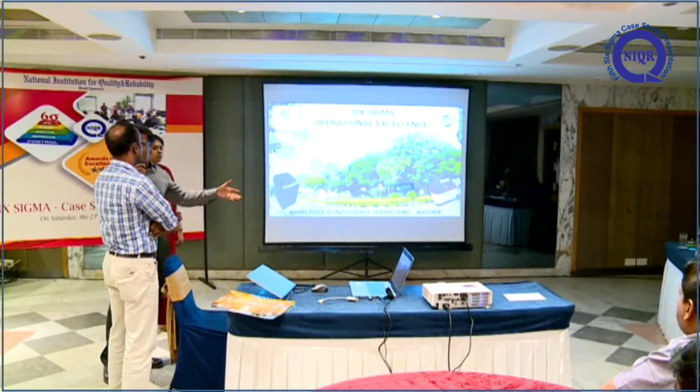This project might be of much interest to everyone here because every day your clothes go through one of these products. Let me introduce my team. I'm the project leader, and they are the project members of our team. Let's start with the presentation.

This is the agenda which we have followed for our project. We have followed a DMAIC approach and classified things as per the agenda. We'll take you through these titles and explain what our product is and what the problem is.

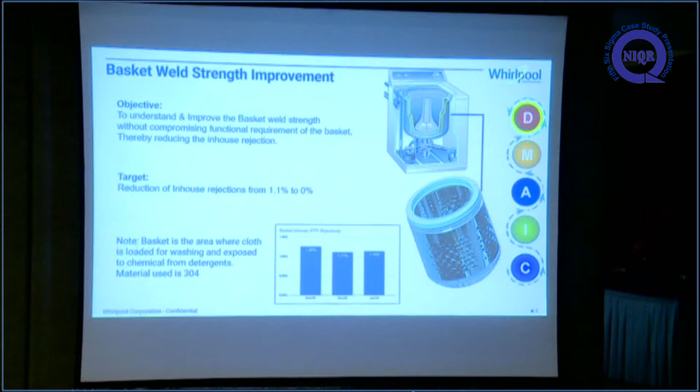The objective of our project is basically to improve the basket welding strength. The basket, as you can see in this animation, plays a major role in washing. You put your clothes, detergent and water in it, so it must have corrosion resistance.

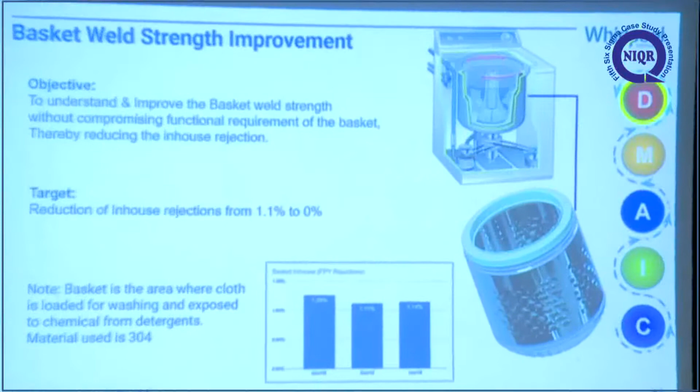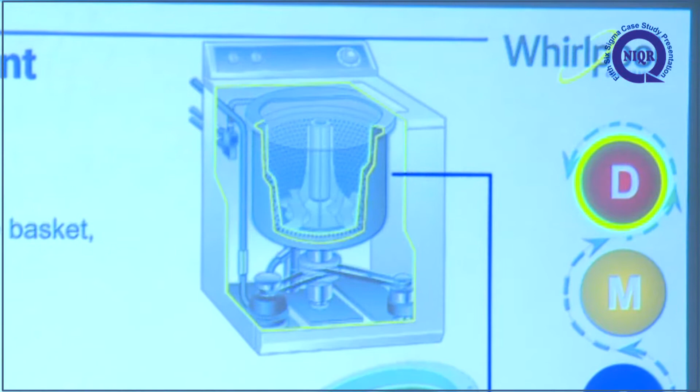Our main objective of this project is improving the welding strength of the basket without compromising any functional requirement as per the specification. Our target is to reduce basket rejections due to quality of welding, which are currently at 1.1%, a higher rate as per our rejections.

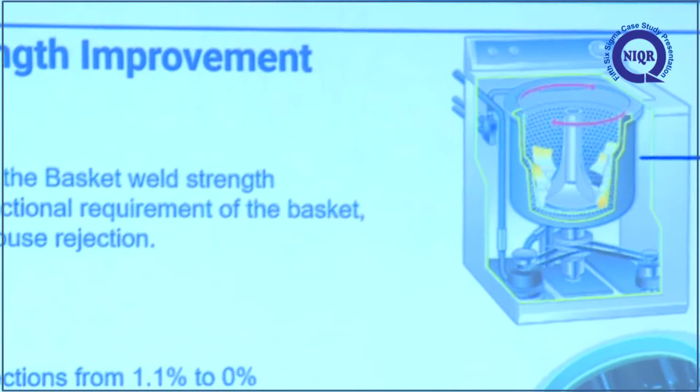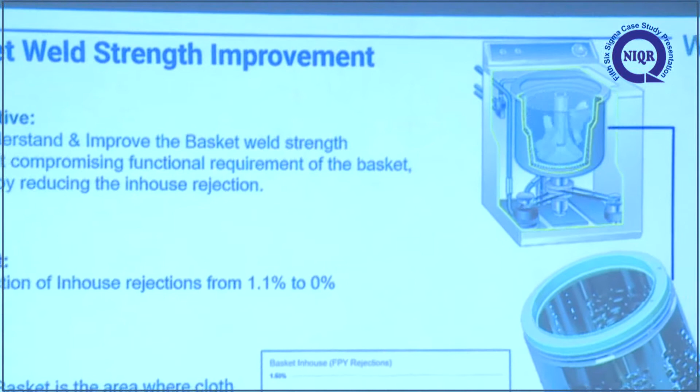We have shown here the history, last 3 months of data. Our project timeline is basically from February to April. We have taken last 3 months data, and it's an average of 1.1%.

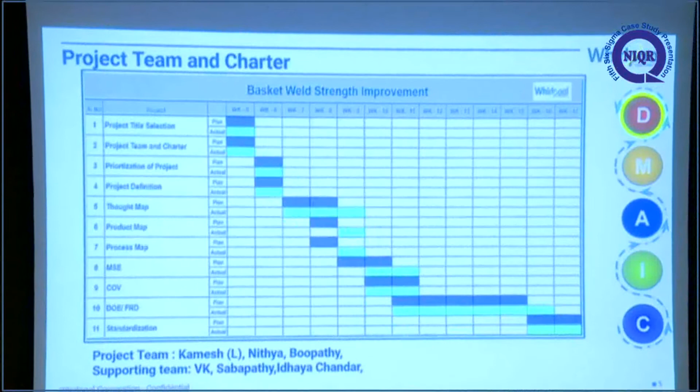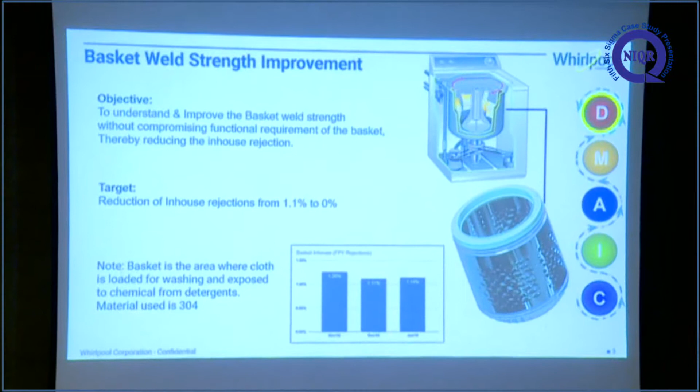Here in Whirlpool, we follow a system called zero defect culture, so basically we are driving through zero defect. Obviously, we cannot drive all defects to zero, but some defects which we can potentially drive to zero defect through design or process robustness, we focus on those.

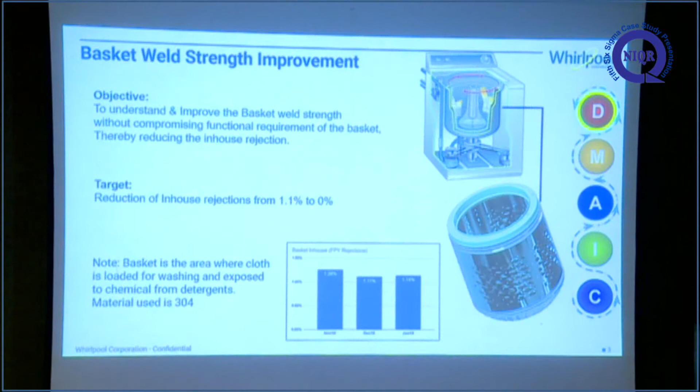I have to mention here how we have prioritized our projects. Obviously, in a traditional methodology, we used to prioritize our projects depending upon the number of occurrences or cost involved in that problem.

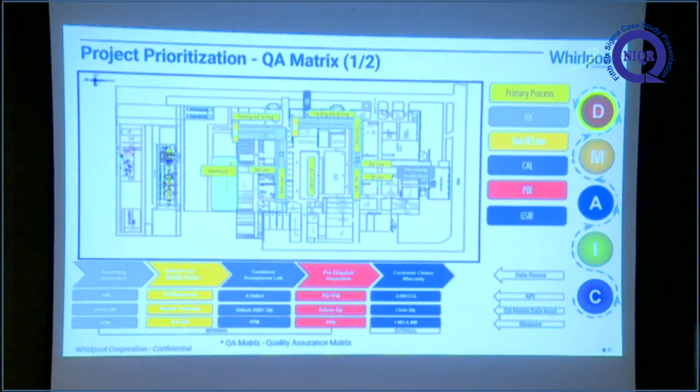Here in Whirlpool, how we have categorized the problem is we use a tool called the quality assurance matrix. In this matrix, we consolidate all the defects coming from customer complaints, in-house rejections, and vendor quality rejections, categorize them, and take 4 main criteria into consideration: occurrence, cost, severity, and detection.

If any defect occurring at the customer end has high impact, severity will be much higher, and cost is also taken into account. It's like an FMEA, we get a final priority index number. With that number, we prioritize which defect we have to focus on this year, at least for the first half yearly, and work on it.

As we have mentioned, if we focus on this particular problem, there will be 50% scrap reduction.

Next we can see the problem definition.

Thank you, Nitya. The problem statement is poor welding strength of the baskets. It is ending up with line rejection and field quality rejection. The basket has to rotate at 740 RPM during the spin stage.

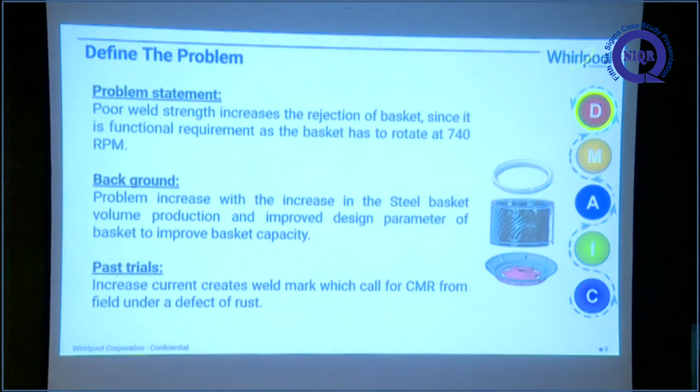So this is the thought map. It's a kind of why-why analysis, an improved version of the why-why analysis tool. The thought map gives you lateral thinking, out-of-the-box thinking.

For example, if we start from how big is the problem and end up with the design, sometimes it will go to a parallel path, like why should we go for spot welding? Why don't we go for a screw locking kind of thing? These kinds of questions are raised in this thought map, which is very powerful compared to the why-why analysis.

So here, how big is the problem: it is increased TCQ in the field, and productivity is also getting affected.

Another example is the alternative fastening method. Why don't we go for screwing instead of spot welding only? If you go for screwing, the cloths are directly contacted with the screws, so it will damage the cloths. So finally we thought to go for COV. This will lead to further movement of the project, taking you to COV, DOE, and MSA.

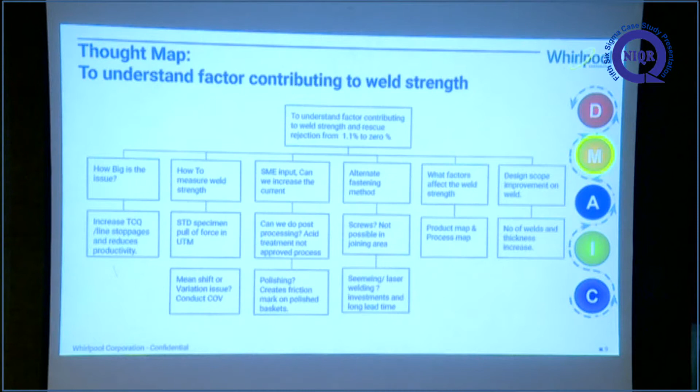So this is the actual thought map we plotted there, and we cannot show it since it is a very small one. We tested that.

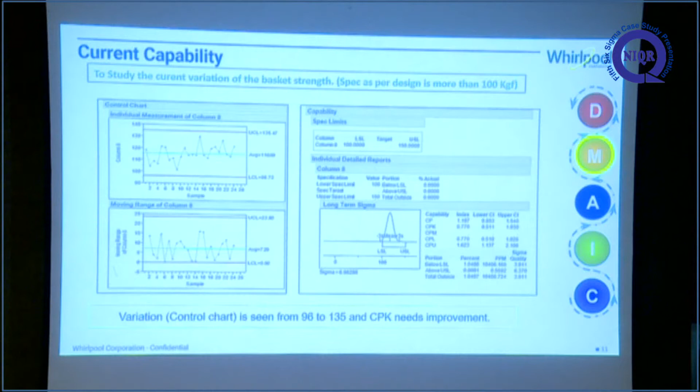And this is the current capability. So we thought of studying the current variation, the basket strength. The specification calls for more than 100 kg force, but from the current capability, the load is measuring from 96 kg to 135 kg force. And the CPK also needs some improvement.

So this is a process map where you can see the X's, inputs and noises in the process. So we went through the process. First process is sheet rolling. The X's are wrapper, sheet rolling fixture, and waviness, and the Y is the basket diameter.

Next process is seam forming. Here you can see the forming: rolled wrapper and seam forming are the X's, and noises also covered here, like dent and improper setting of the sheets.

Another process is seam locking. There the inputs are edges and seam locking fixture, and foreign particle in between the sheets, and the location of the sheets are the noises.

Then the grooving operation, after that the spot welding. Finally the spot welding is there. The grooved wrappers are joined together after the seam locking. The welding, spot welding, takes place over the wrapper. There are 9 spot welds to join the wrappers.

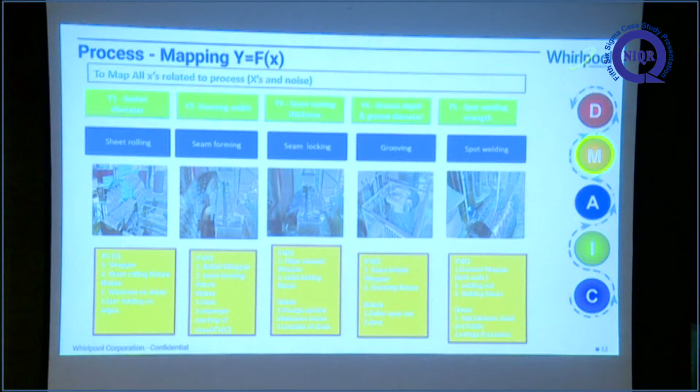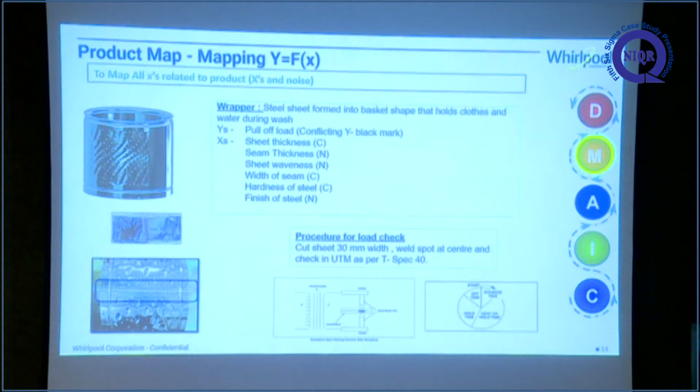If you increase the current, the black mark will appear over this part. If you reduce the current, the welding strength will go down. And these are all the noises and contributors to that. The best part is we cut the sheet into 30 mm width to check the welding strength.

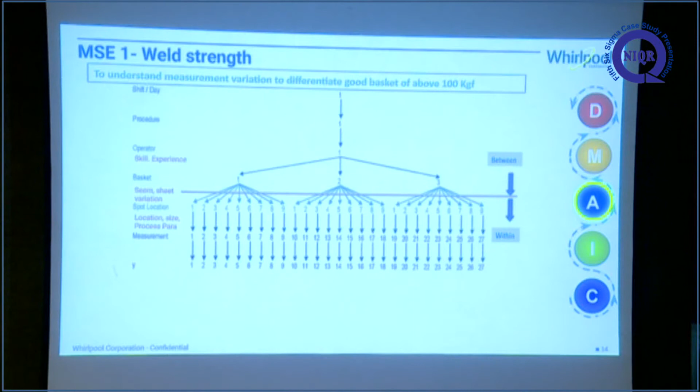So we put a sampling tree. There you can see one shift, one procedure, and operator. We have taken 3 baskets and measured them. There are 9 locations in the spot welding basket, so 27 measurements we have taken.

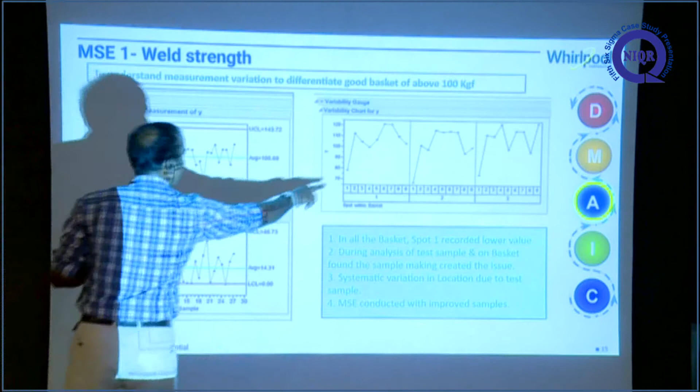Here you can see the weld strength. Actually, in the chart you can see that weld strength is reducing in the first spots. There are 9 spots; the initial spot gets a low value in the welding strength.

So we thought this is because of the sampling we prepared. Actually, we cut the sheet to check the weld strength, and the first spot, which is near the cutting area, ends up with a low value. So we thought of going for MSE to shift the mean.

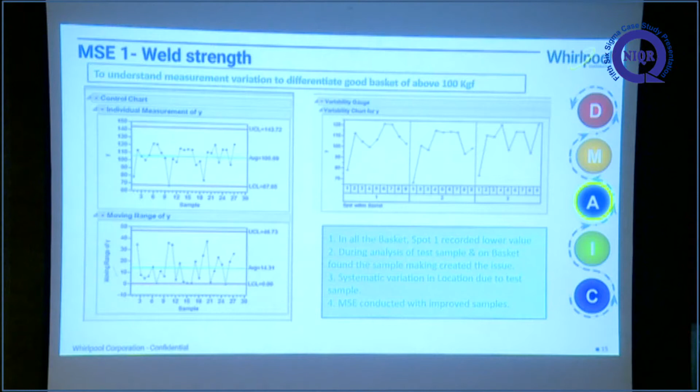In the second MSE, you can see we shifted the mean to a 26 kgf error. But here we found that the measurement variation is confounded with the location. So day-to-day measurement will have the location confounding also. So we thought of going for detecting this error in the coming MSE series.

So far, what happened was the thought map is a very good tool. We use it in how project presentations go within Whirlpool: we go back to the thought map and come back to each of the slides. So that is how thoughts drive our tools. It's not the tool which runs through; whatever questions we are trying to answer, the thought from there drives the tools.

So far for MSE, I have a variation, so I have to accept it because there is a measurement variation which has to be done by operators, line operators, on every shift. With that MSE, 26 kgf variation, whatever CPK test or anything upfront before this was having that variation. Whether we specifically say it out or not, that variation was there in all the measurements.

So coming to COV, the first thing of the COV idea is: okay, where should I work? I have a problem, where should I work?

That is where this component variation tool we started using. First question was, should I work within the spots or between the spots, technically between the baskets? Because I want to understand how the noise changes, so the variation is occurring in my spot welding. So the sampling tree is useful for this.

So what we try to do is we use two baskets. We took two baskets, and baskets with spots within the baskets.

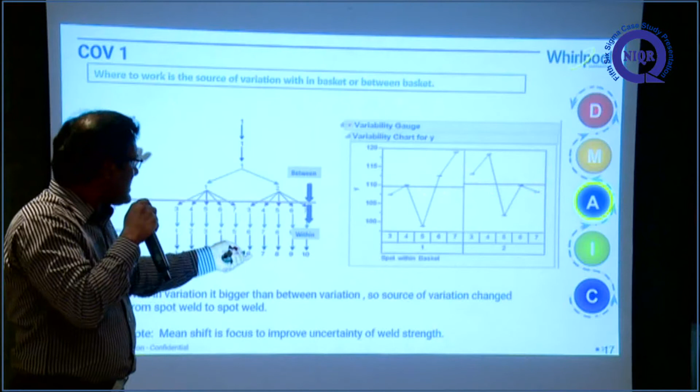So the first area I have to work on is what is changing within the spots from the first spot, because it's taking place within minutes, right? Within that there is a variation in spots. So first I want to see, based on the process map and product map he has done, what are the factors changing that fast.

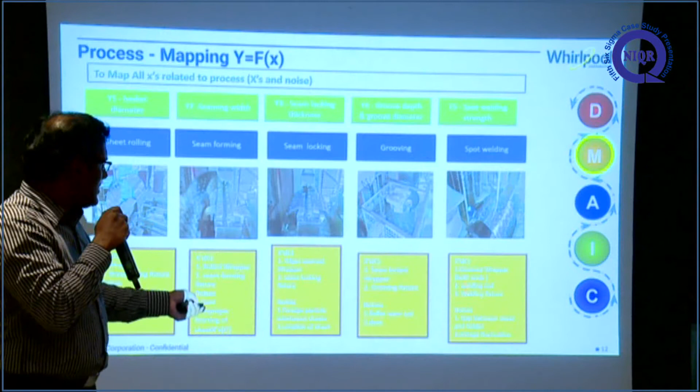So here the CFT team has already mentioned what are the things they think are changing during the process and what are the things which are constant during the process. Again, with reference to each of this, I'm just going to take those factors and study them next.

And also one more thing I found is the averages. Right now with measurement variation of 26 kgf and running average around 110, there is a potential that this data point can also have that measurement variation, which can go below 100.

And one of the important reasons why we are working on making sure this weld strength is good is, as he said, it might also end up opening up a basket, which is a complete machine replacement. And again, this is the appliance industry, so the customer directly interacts with it and they can find the defect at the first instance, and that calls for a complete machine replacement.

Again, when I go back to the thought map, there were too many questions asked. We end up going to the equipment supplier. We also went to SAIL to get their opinion, since SAIL and JSW are the suppliers who supply steel to us. We asked, guys, can you help us with this?

How to improve this? So one of the things they said is your seam is the problem. Can you increase the thickness of the seam? But one thing is the basket is round, so there was a limitation on how much we can increase. And obviously, sheet metal waviness, everyone knows there's only so much we can do about it.

So to study that, we also went to VIT for all the theoretical studies. There we found that for the current process itself, your value should be high. To validate that theory, instead of using a basket, we directly took sheets and welded it. We just took raw sheets from SAIL, cut it and welded it, and we found it came up to 150. Then we also studied the seam.

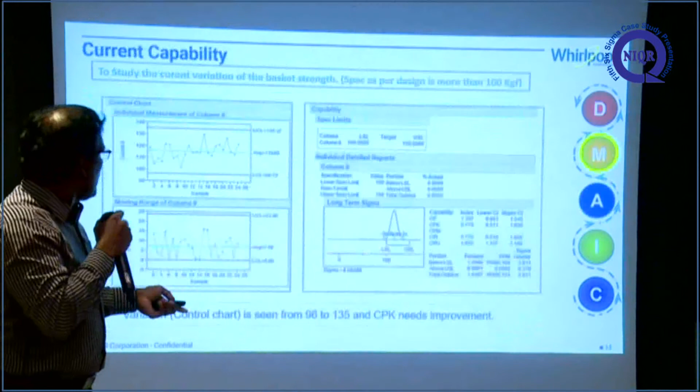See, they talk about going for a design improvement. For a process change or process variation, they are talking about design change. They are talking about laser welding. So this is the advantage of this approach, and concurrently all the options will be driven.

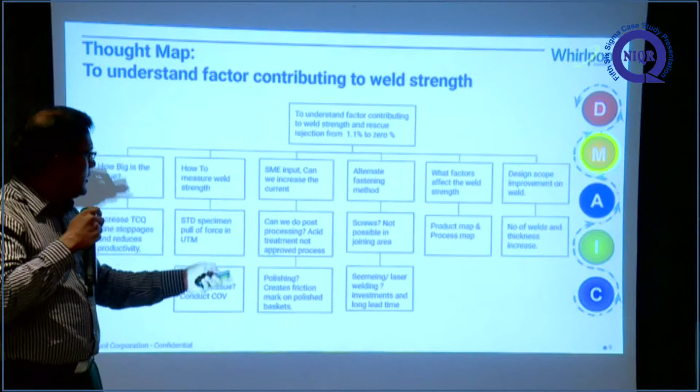So when I drive concurrently, one of the easiest options was increasing the thickness. I increase the thickness, I get a better value. But again, that increases the cost by 70 rupees per machine. That's a lot. That's a lot of money.

At least by the parallel path, I have some other option if something doesn't work.

So based on the factors found in COV2 and COV1, we selected the factors from the process map. What are the things which are changing between the spots? So we came up with 8 factors, and again we use a fractional design.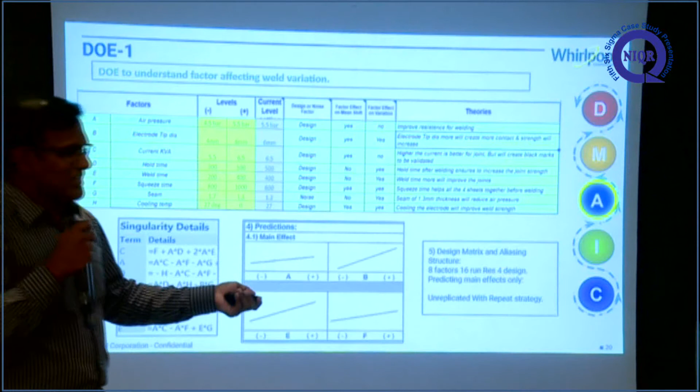These are process walk parameters, because a lot of times, as the senior members here will know, the specification chart will say something and the actual process running will be different. So these are the actual process parameters which were there.

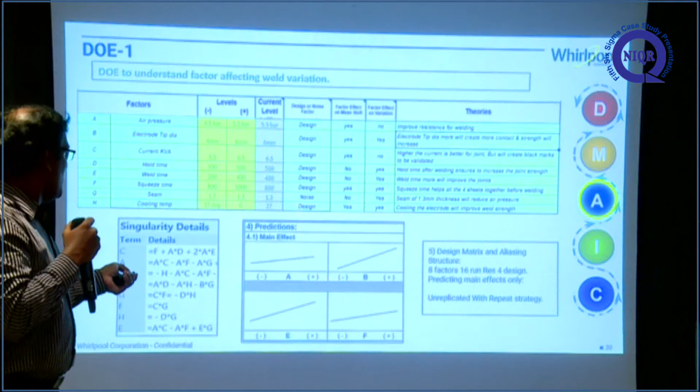This was defined by, when I say design factor, yes, I can manipulate that factor. When I say there's a noise factor, right now it's not manipulated. Whatever comes, it gets into production.

With the thought map and the COE help, we see whether this shift will affect the mean or the variation. Based on that we map, and there are theories of why we choose what.

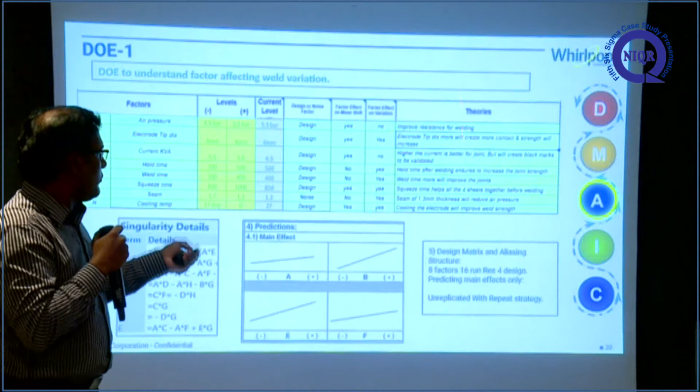And since it's a fractional factorial, I have this aliasing structure, which is the singularity details. One of the critical points of starting a DOE with a Moin form is we have to have a prediction. We can't start a DOE without a prediction.

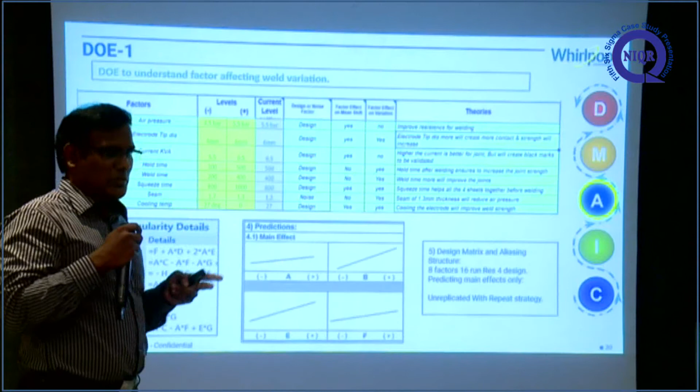Probably the chart was very big, I just cut only a few things. I have to give my prediction of why I choose this and what the prediction is, because I have to answer for both. If my prediction does not come true, I have to understand why, because by physics everything works, right?

If I increase air pressure, the weld strength should be good. If it's not coming, then I have to answer why. And if my prediction is other way around, it also helps sometimes, since we can check whether the minus and plus levels have been swapped, as simple as that.

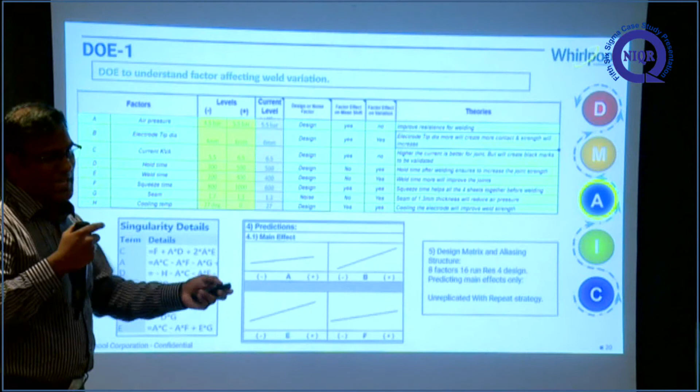So this is an 8 factor, 16 run, resolution 4 design. Here I can clearly study all the main effects. So my first objective is to see, can I even recreate what is happening in my production? That is my first objective.

Based on the Moin form, this is a factor relationship diagram. Again, it looks complicated, but I've just plotted out whatever is there. So what this talks about is, these are the design factors, because what I always want to do is make my design factor rise above all the noise conditions. Then I will call it a significant design.

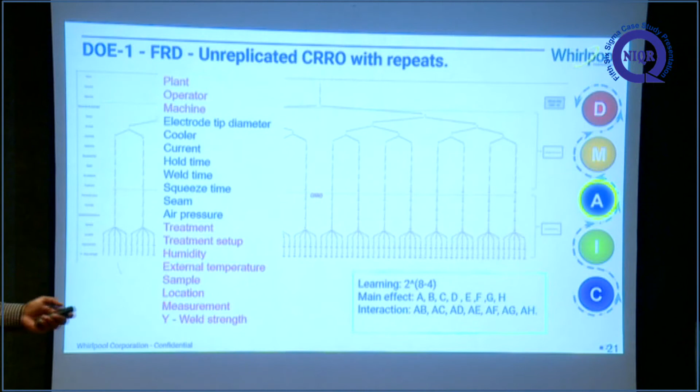Okay, and what things can I learn? I can learn main effects. This is the practical data we collected, and the variation created was 93 to 121, which represents my production.

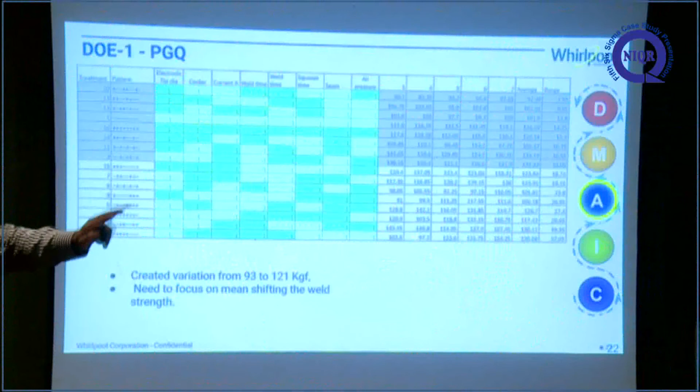I'll just quickly skip through a few things. Based on the p-values, one of the things we look at Whirlpool is PGQ. This is one of the things we changed, because too much statistics into Six Sigma makes sure the engineer does not use it. So a lot of times, I will not even use statistics, I'll go with the practical data of how I can make decisions. This helped us in making sure all engineers start using this.

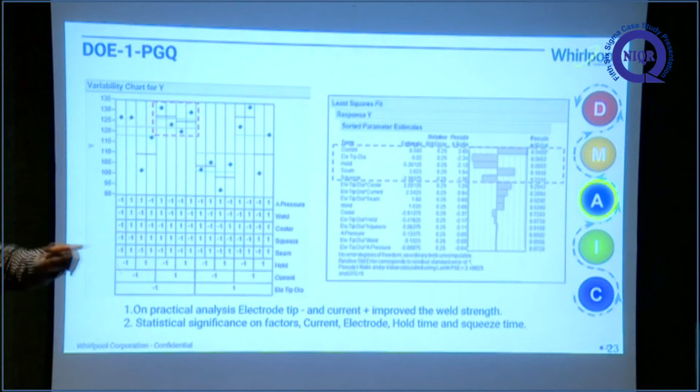Similarly, the same statistics also apply. And again, at Whirlpool, we use 20% alpha risk, just to make sure the company takes all the producer's risk, versus we don't want any beta risk for the customers.

So based on these factors, based on the normal probability plot, the first preference is given to practical analysis. Next comes all the quantitative analysis. Also based on the NPP plot, I could clearly see that the same 4 factors are showing up. And interestingly, for variation, the electrode tip into hold time interaction is also showing up.

One of the things we are very clear about is, if there is only one factor causing a problem, probably we would have already fixed that problem. A lot of times the interactions, whatever interactions we see here, that is the story of a Six Sigma project.

And again, all the main effects plot, you can directly see what factor is affecting, and interaction plot where this. I'll run through a few of the DOEs too.

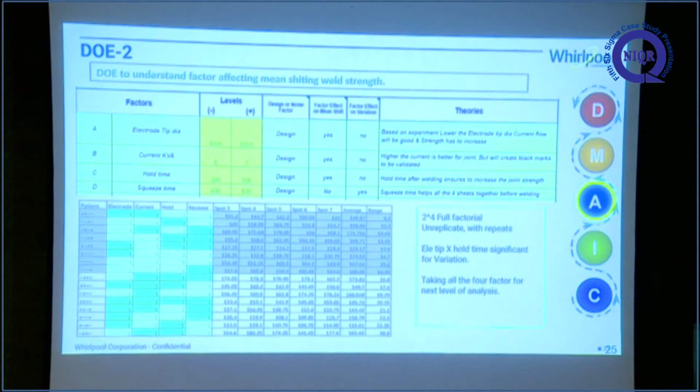Again, we do only 2-level DOEs. We never do more than 2-level DOEs in the initial stages, because most of the mechanical components, unlike the chemical industry where you have a very big curve, run in a linear fashion. At least with a linear graph, you can find which direction to move.

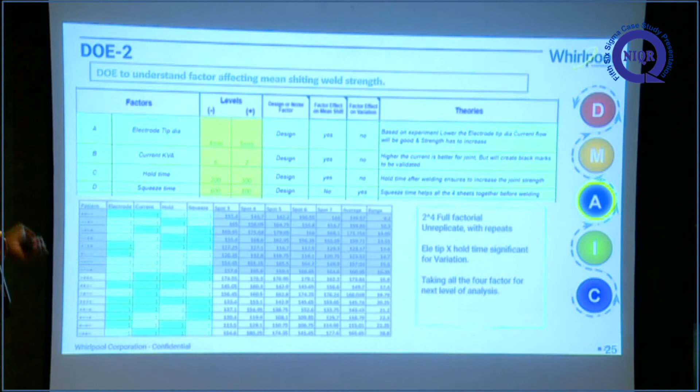Based on this, the 4 factors we took, it's a 2 power 4 full factorial, because we want to study interaction here. I'll skip this. Based on that, you can start seeing that electrode tip and the current are starting to interact, and the interaction looks like this.

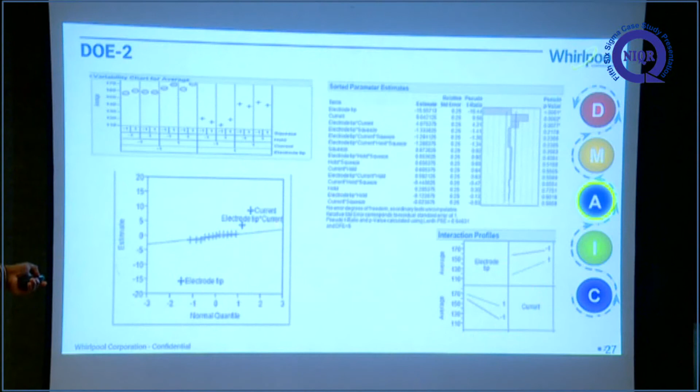And this is one of the requirements of Whirlpool. Again, we have to create a prediction equation to see how well you have predicted this DOE. So based on the prediction equation, I would draw a contour plot to see where the risk is. And probably this region might have a small risk where it is going less than 130.

Again, to explain this, this is the x-axis, which is electrode dia, and current in y-axis. And these are the strengths we will get. And probably this is the potential region.

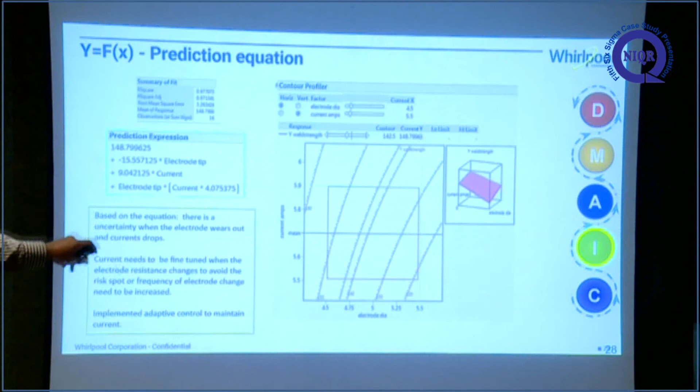Based on this decision, we went with implementing adaptive controls, which would maintain my current levels. And we also finally ran confirmation runs based on all the settings, electrode controls, and whatever factors were left, like coolers - we made sure that was kept at, we implemented a chiller.

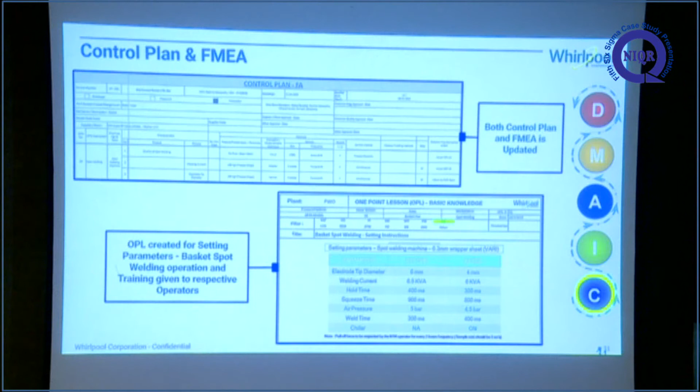And quickly, I will finish in 2 minutes with my control plan. After our confirmation, we have updated all the control points and we have created an OPL, a one-point lesson, which we can train the operators who are working in the line so that they can set the correct parameters, and these are all the standardization.

As for the standardization part, we use 5 questions. It's like a self-assessment. We'll ask 5 questions: in which stage are we? So we have improved from 44% to 76%.

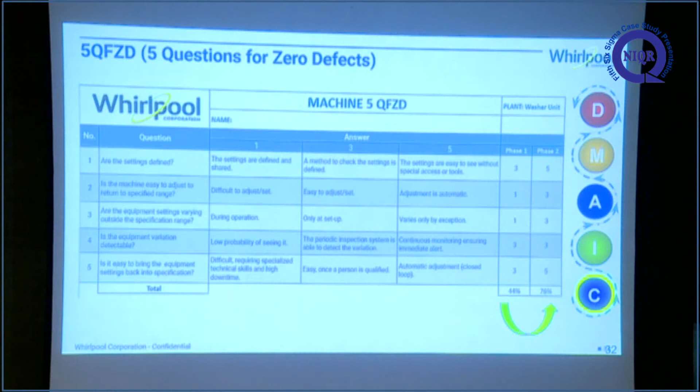Anyway, congratulations once again. A lot of new tools also you have used. There are a few questions.

One is this basket weld strength problem - you have taken this based on your in-house rejections, that 1.1% you mentioned. Is there any correlation between the customer complaints and this?

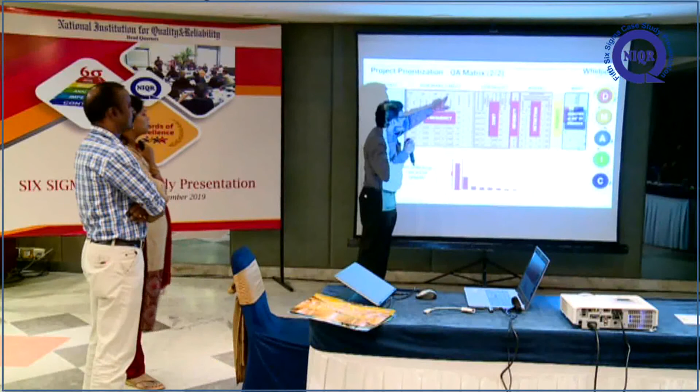GSAR is nothing but service incident rate. So all these numbers and the cost associated with it is taken here, and the severity.

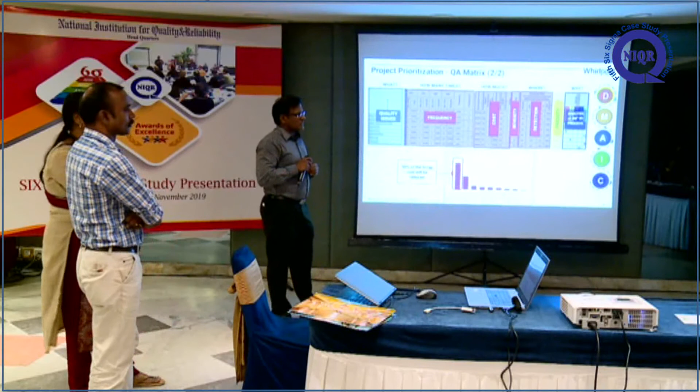That's true, but only my point is, because you stressed that this project was taken based on the in-house rejections - yes - but my point is whether this also had a relationship with the customer complaints. Because of this, whether customers also had some problems, whether they have reported.

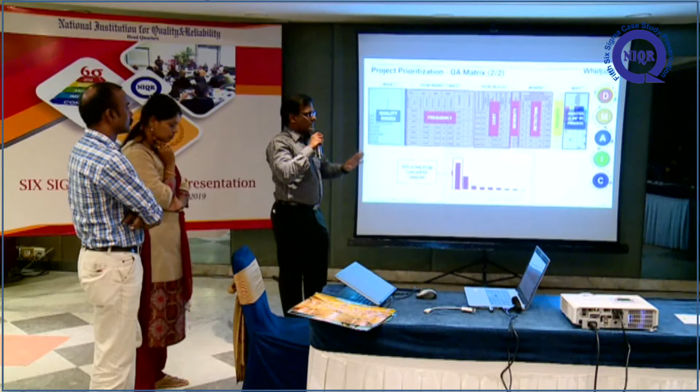The rejection is high because if we suspect it, we will reject it. And also there were occurrences, 1 or 2 occurrences reported from the field. The reason we are not taking that matrix is it's a lagging metric - your customer has to use it for 6 months, 7 months to make that defect happen.

So since this is one of the, like, a safety requirement, that is the reason why the scrap rate is very high. If we doubt it, we are going to stop it. We are not going to let it into the market.

Okay, one suggestion also - since this is a Six Sigma project, maybe this 1.1 you can express in terms of PPM. Because what happens is, our thinking is, 1.1 means, oh, it's only 1, what is there? That's one suggestion.

Second thing is this thought map is a good idea bringing into it. But my point is, see, 1.1% rejections are there, 98.9 is good with respect to this defect. Now, in the thought map, when you go, what are the new things you look at?

First of all, we should think of what are the causes - maybe assignable causes or other things - because of which 1.1% of the units showed this defect. But don't you think, first of all, look at what are the causes because of which we got this 1.1% rejections, instead of straight away getting into the thought mapping?

Sir, thought map itself, that is what thought map helps with. It asks the basic questions of how big is the issue, how to measure strength, or SME input - can we increase the current, and small things.

The reason is, when I start the thought map, I am already in the situation. So what thought map asks is, I am not showing the bigger one because all the questions were there. Each linear path is a sequential path. So all 5 Why comes here.

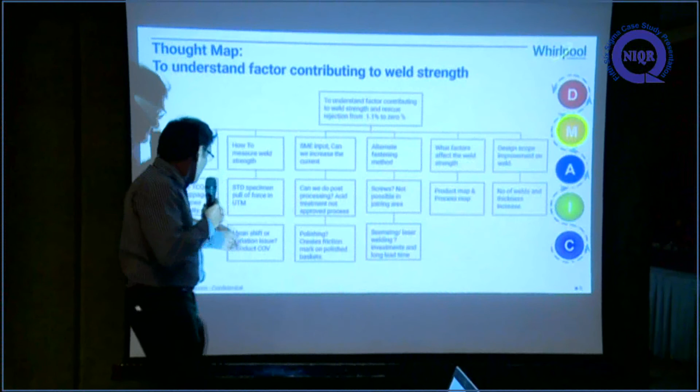First one, what I want to ask is: special cause or common cause? It's a mean shift, or a variation issue. So all the basic questions are asked, and then it asks us to use a tool to answer this.

So I'm coming back and saying that it doesn't look - because MSA variation was also there, right? MSA of 26 kgf, we didn't measure it. So now we understood it's a mean shift issue more than the variation issue, or bigger than the variation - I want to shift the mean.

That means that thought process, what we call as brainstorming for identifying the various causes - that thought process you are standardizing. In the sense, you are giving the inputs of what our thought process should be. And through these questions, we can look into and then identify the causes.

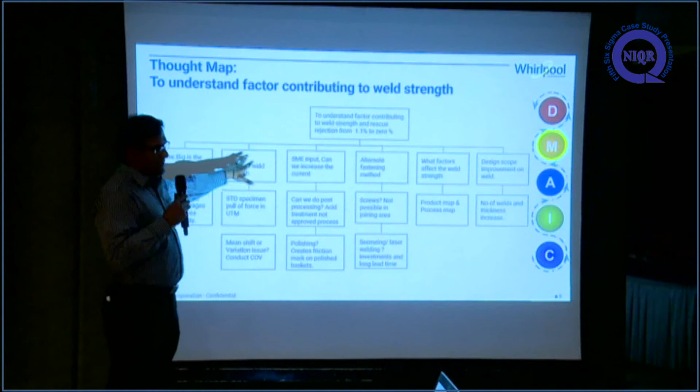Yes, I think that is what you are doing, and in addition to this, because CFT gives lot of information. Sometimes what happens is when you take a thought and walk through, we only talk about this - all CFT members try to only focus on this.

Now the first thing is all open. Again, when we close the project, they come back and see whether anything is left open.

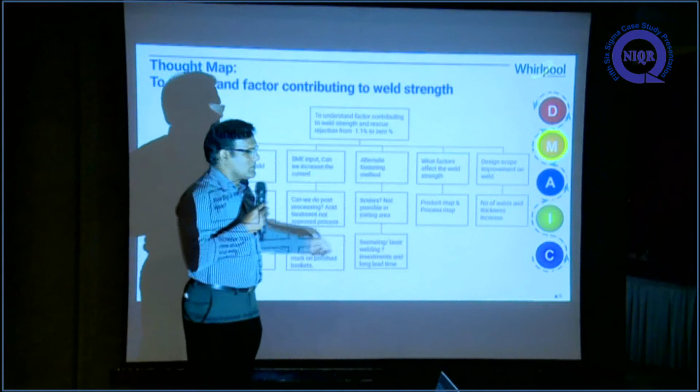Like laser welding and seam welding - now this was also discussed, whether we can invest in this and completely come out of this one. I don't even have to do inspection for those. So those types of discussion happen in the linear paths.

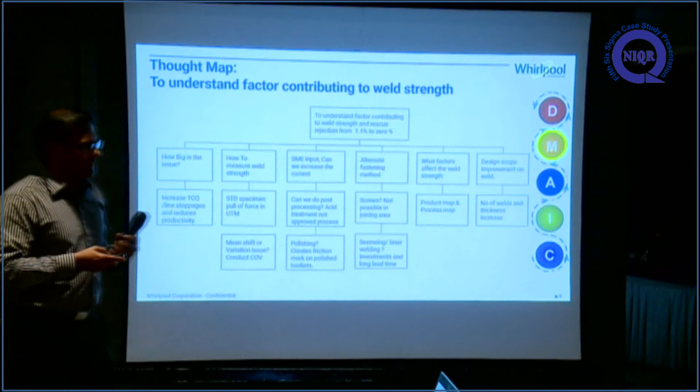Good. My other point is, because time issue also we have to consider. Now the DOE, when you have done 8 factors, 2 levels - anyway, you cannot go for full factorial, you have to go for fractional factorial.

But how do you decide those factors and the levels? What is the basis for that? Sir, to decide about those combinations, treatment combinations...

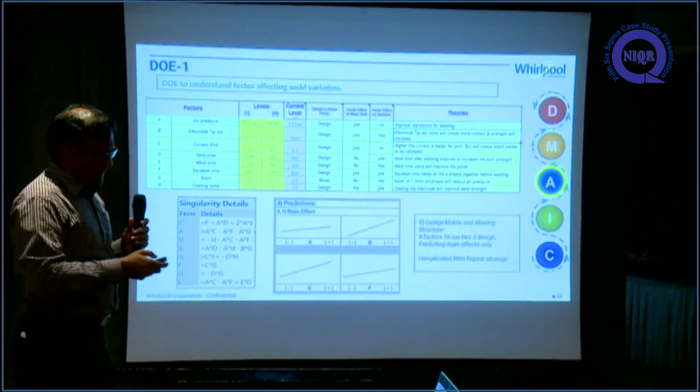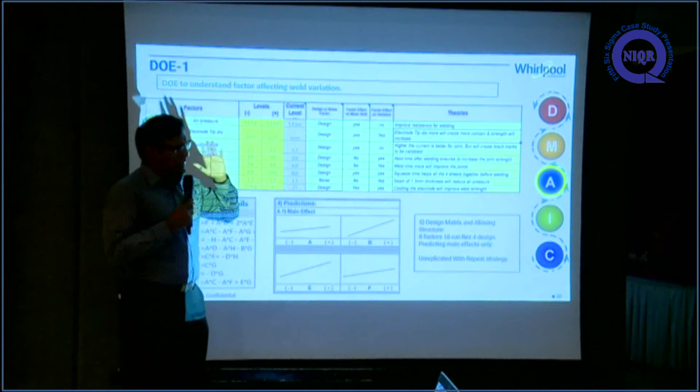What are the things between each spot that can vary, and there are a few things which are subject matter expert driven - people say, Kamesh, you have to have these things. Without a current, machine will not run. So a few things are something like this.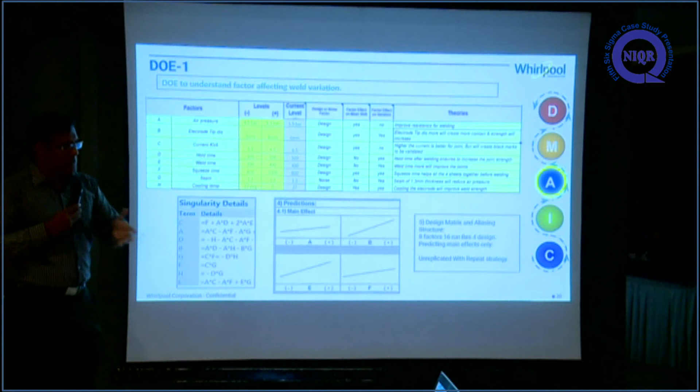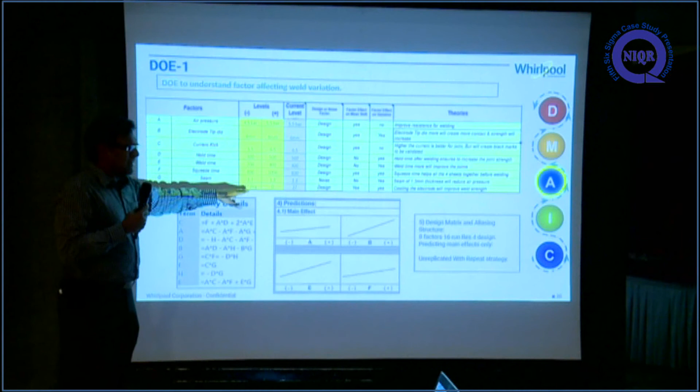What are the things that partially can change - electrode tip diameter varies between each spot, the current, everything. Again the seam changes, cooling temperature - initially we had air cooling, then it was a liquid cooling system, but open to air. Around afternoon it increases, and again seam, squeeze time, weld time, hold time - a lot of things can change from point to point.

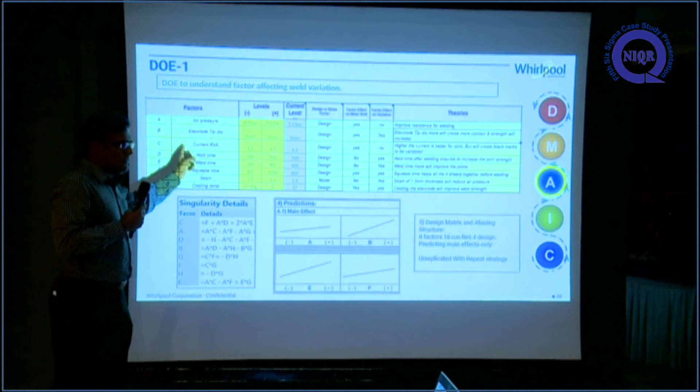Let's take that one, because I've established in COE that spot to spot these things are changing. If at all some Y is changing, these X's have to change. Without these X's changing, that Y will not change. So I'm just telling what is happening with this.

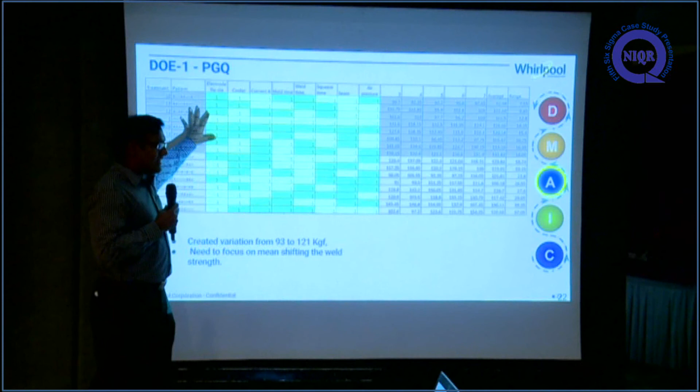So in the first DOE, I'm also establishing this variation. Yes, I'm seeing a variation which I see in my CPK study - meaning I have the factors which are creating that variation. So this established that I didn't miss anything here.

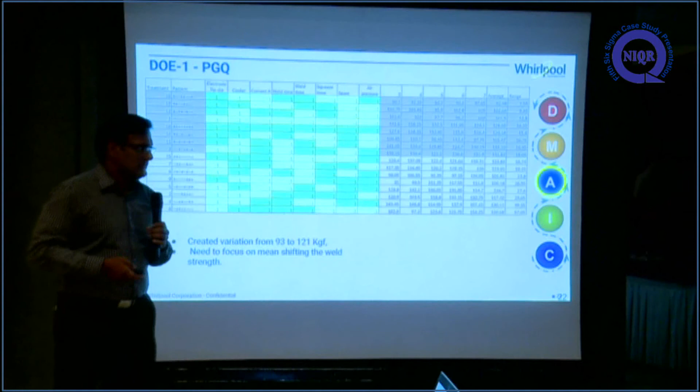There are a few projects where this variation will not come, then we go back to the first DOE, add more factors, remove a few factors in the first DOE itself. But in the levels, do you take anything existing, or are both new levels?

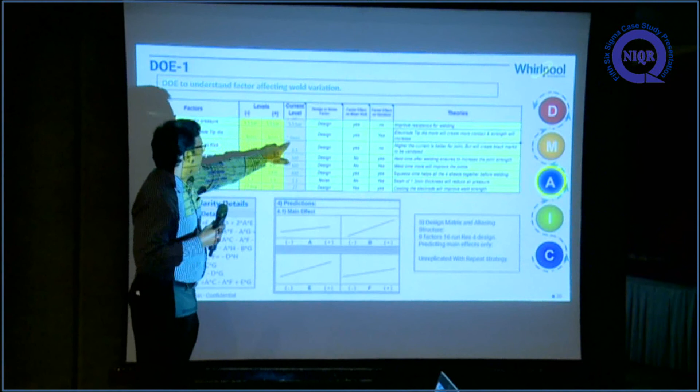Since we want to shift the mean, initially from the mean I just wanted to go with a few things at the minus, and a few things - current and other things we already know. If I go above this, black spark is coming, so current and other things I can't go top, I have to come down.

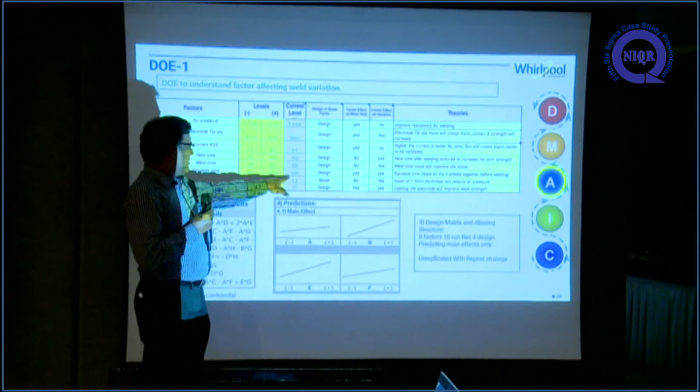Like squeeze time and other things, we already increased too much - it's already 800, so we want to slightly increase and see the seam gap, technically reduce the seam gap based on the COA design. So that is how we choose, and this discussion helps us make sure we are okay with these levels - variation or mean shift.

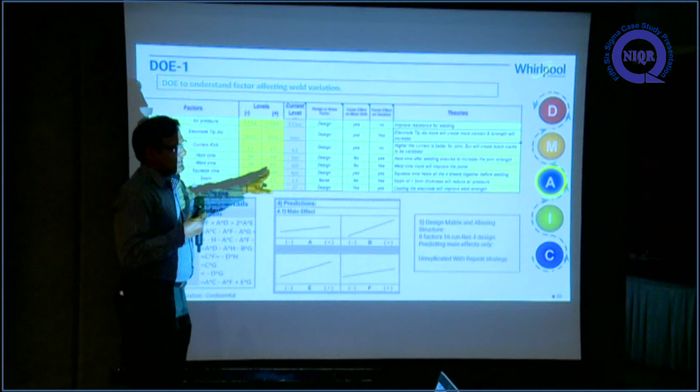Good. Thank you, sir. Oh, good. Thank you. Thank you, sir.